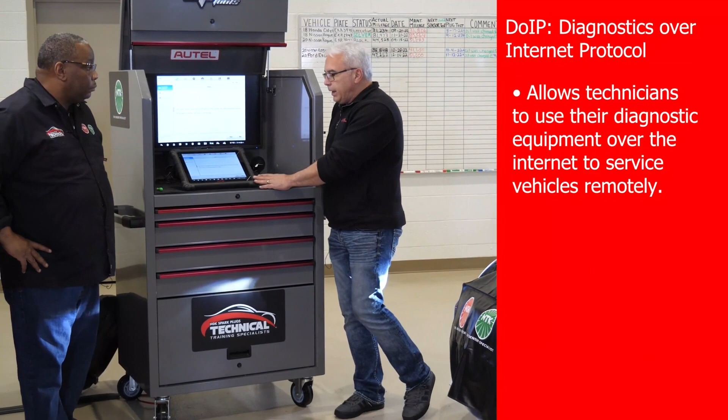And what does DOIP allow us to do? It allows us to take a piece of diagnostic equipment made for servicing an automobile in the repair facility and being able to hook that up to the internet and perform remote diagnostics. Now, all of our Autel scan tools, the topper end of our spectrum here, do support remote diagnostics, which is something that we can go ahead and certify that somebody's an expert in a certain area, whether it be reprogramming or some form of diagnostics, whatever the case happens to be.

And we all need help from time to time in our service space. Maybe we don't have the equipment, maybe we don't have the knowledge or the experience on a certain type of car. And if I go ahead and subscribe to remote diagnostics, I can go ahead and turn that feature on my scan tool, and it will pull up a list of people that are qualified for the area that I need help with. And then I can select. There is a fee, obviously. Those people aren't going to work for free.

They're people like you and I. We all have our specialties within the industry. We just, at Autel, vet that they are a legitimate expert, and then we can rely on their experience or maybe their equipment if it's relating to programming or whatever the case happens to be. So with the DOIP protocol that a lot of the European cars are going to, we need to be able to support that with our diagnostic equipment so that situations like what we just described can actually occur, whether it be remote diagnostics, remote programming, whatever the case happens to be.

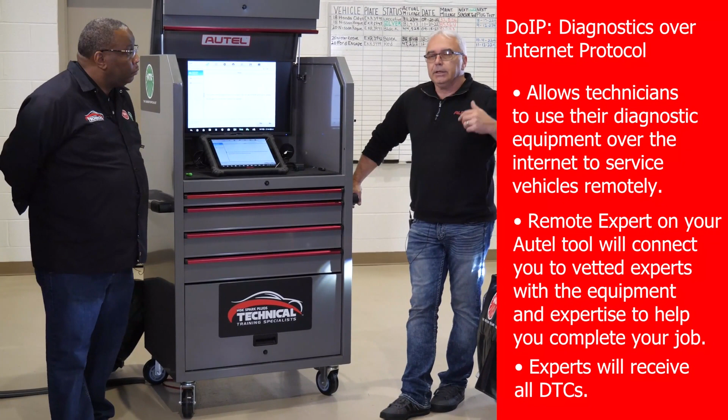Another thing to keep in mind with the DOIP protocol is it will give me, as the expert interfacing this, a list of every trouble code that was ever set. So this is beneficial as well.

It's kind of like dealership networks had this ability for a long time, not so much through the actual vehicle, but if a car came into a dealership, it was programmed into their little computer. So even if I took my car to a Chevy dealership in Ohio, and then moved out west to California, because they were all within that General Motors network, that new repair tech could pull up the repair history and complaint histories on my vehicle. We have that ability here with this new type of protocol.

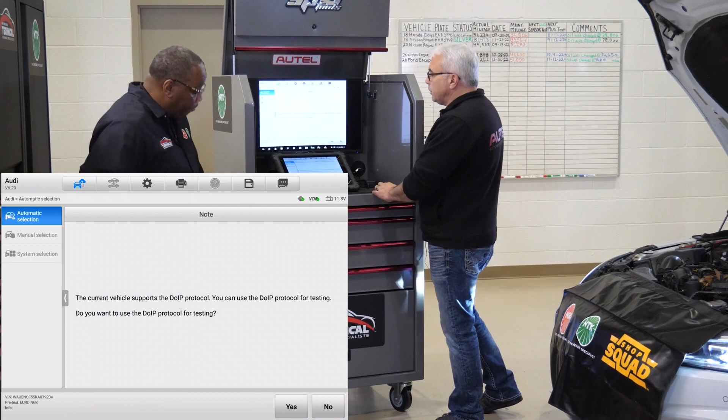So when I first hook the scan tool up, it tells me the vehicle supports it, and asks if I want to use the DOIP protocol for testing. I'm going to say no in this instance. I don't have to say yes. We're going to keep it internal as to us doing types of testing on this vehicle.

So we'll let it establish communication. I'm pretty sure I left the key in the on position here. Again, all the screens look very similar. We start off with the topology screen. We can also select the list to see all the different modules, see if it supports ADAS, stuff along those lines. And then I have all my little buttons on the left.

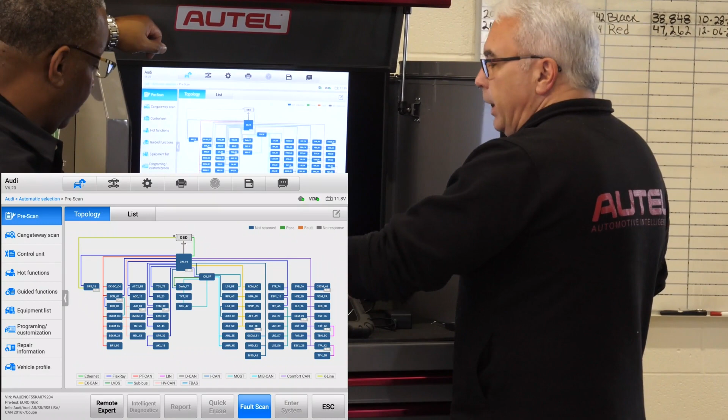I can do a fault scan. We've done this on several other cars throughout our training webinars here with NGK, so just to save a little bit of time, we'll bypass that. We have our hot functions, which we referenced in two of our previous webinars as well.

And we can go right through the list here, or we can select specific types of information that maybe Phil wants to share with us here. Yeah, great. Yeah, thanks, John.

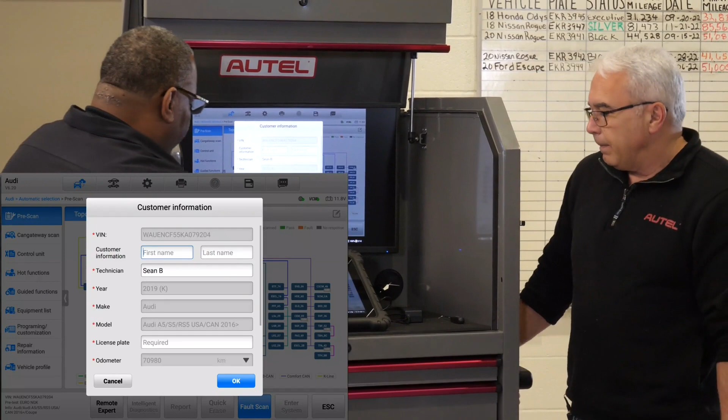So if we hit fault scan here and just let it go through its thing, we could simply type in the customer information, and we'll put a substitute license plate in there. Anything with an asterisk has to be filled out. So once I did that, now it's doing its thing.

Notice that it's going ahead and talking to each one of the modules on the network. You can see how many modules this particular Audi has—now that is more top of the line type of vehicle—but there are many different modules talking to each other across the various networks that this car supports here.

Anyone that actually has a trouble code will be highlighted with the little orange, and it'll give you a little number in a circle, representing how many different types of codes there happen to be.

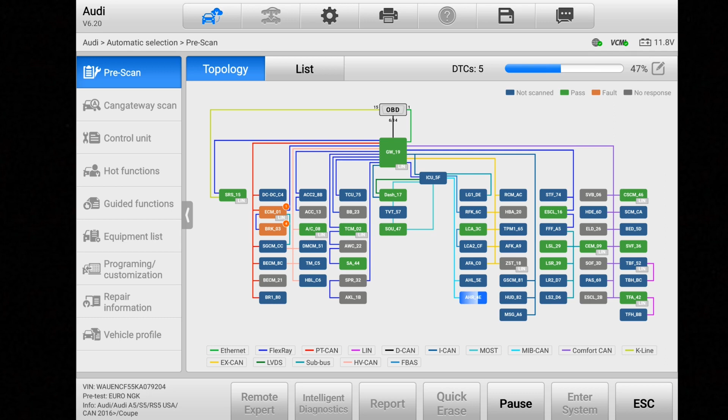And what's great about this too, look at the color coding of the modules that have not been scanned yet—those are in blue—and the modules that have been scanned and passed are in green, and if there's a fault, it'll pop up in orange. And another great aspect of the Autel scan tool is that if we're not getting any response with that particular module, it's going to show up in gray.

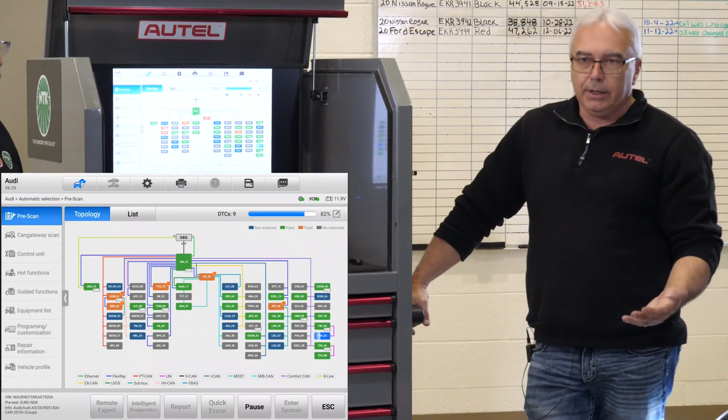Also, the color coding of the wiring on the topology screen can aid in your diagnostics as well, not just necessarily on European cars, but any of the vehicles we've been talking about. Each one of these different color codes represents a different communication line of data. So if we happen to notice that all the modules connected on the red line had no communication, well, that's going to give us a diagnostic pathway, so to speak, right? We probably don't have a half a dozen bad modules that are causing the problem—it's probably more of a circuit type of problem that we'd want to address our attention to.

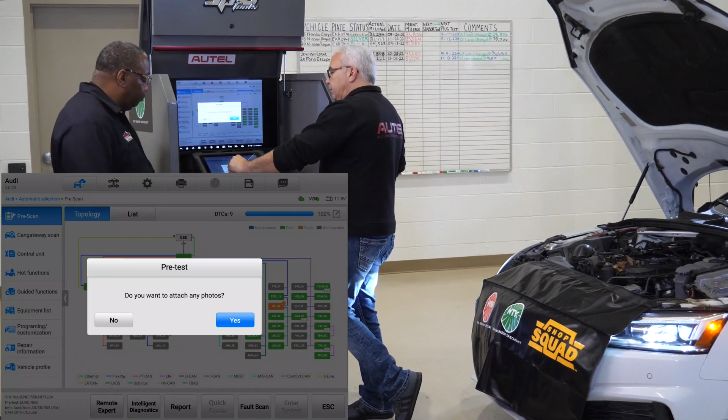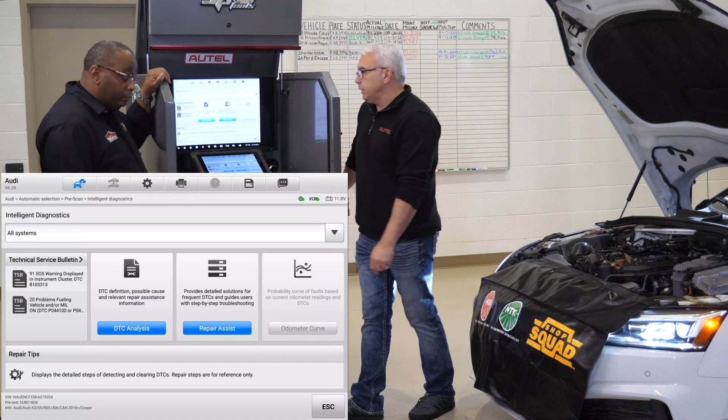I don't want to attach any photos to the pre-scan, so we're just going to say no. And at this point, we do have the Intelligent Diagnostics button, so we'll go ahead and click that. Now remember, we did have a couple codes that pulled up. We got a couple technical service bulletins that may or may not apply.

What's cool is if you see at the very top here where it says all systems - if I click on all systems and say, hey, I just want to see what's going on related to the engine management system, we can see the engine control module here and all the codes related to that. Then you have the ABS system, the brake system, tire pressure warning. So depending on what direction you want to address what the customer is coming for, this is all about meeting the customer needs while performing the diagnostics.

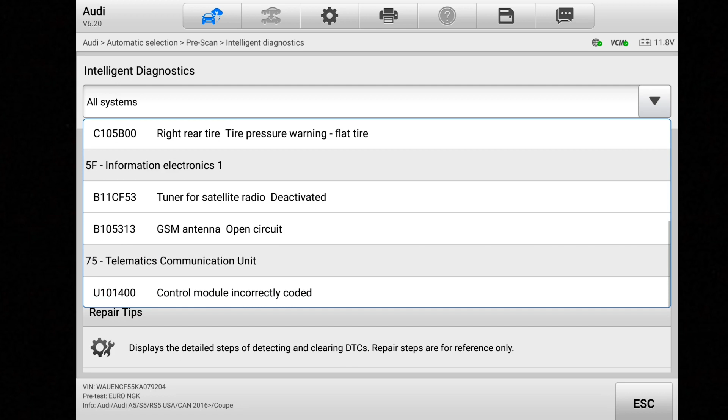So if the customer just came due to the check engine light or some sort of drivability concern, then we'll walk down that path. So just for giggles, let's stick with this particular ECM code, and the Intelligent Diagnostics here show you the technical service bulletin that may be related, like this P0441.

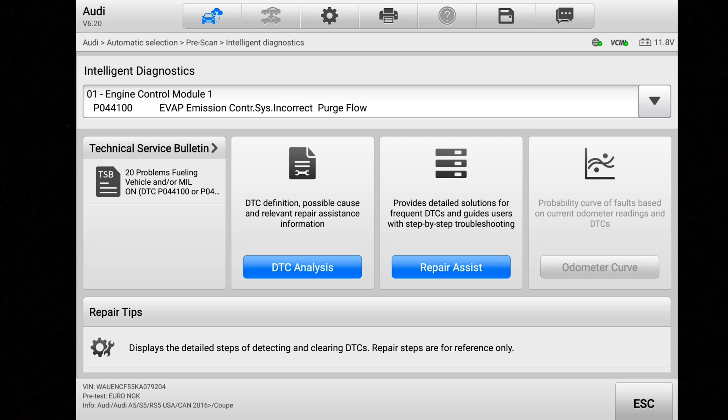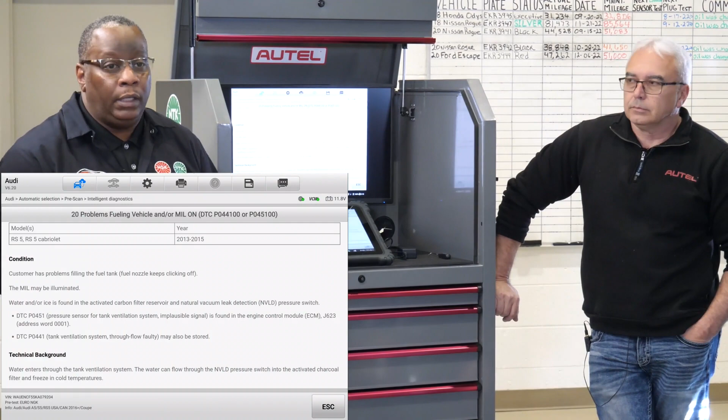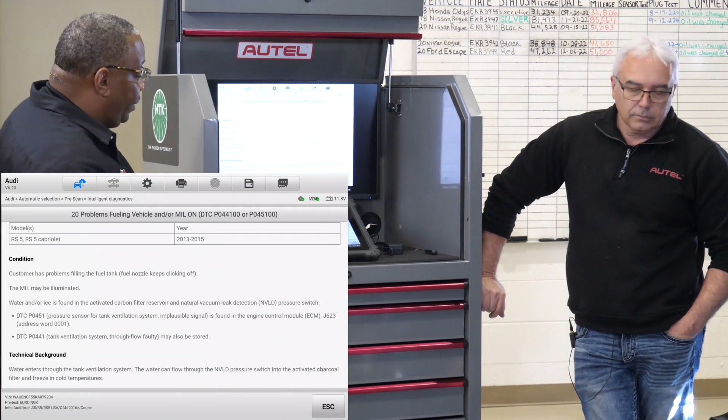Let's click on that, and you can see it outlines the technical service bulletin to allow you to go through your diagnostic process. What's the diagnostic process? First, we verify the customer concern. Then we walk through any type of history we could learn, like John just mentioned - if we wanted to go through the Audi diagnostics and look at the entire history of what was happening with this vehicle, any codes from the past. Fine, but having a conversation with the customer, checking repair history, understanding what may have been done within the last 30 days or so, and then continuing with a full system scan. We look at the DTCs, we see that we have a DTC, and the technical service bulletin is the next step of the diagnostic process.

As we go through the diagnostic process, it's nice to work with scan tools that show us intelligent diagnostics, bringing that information back in instead of us stopping and going to look in our information database on a different system. This is really, really helpful in streamlining our diagnostic process.

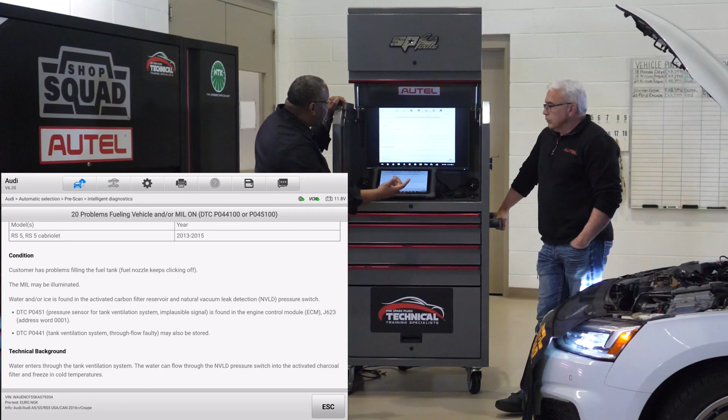With this here, we could take into consideration that the condition is that the customer has problems fueling the tank. So right now we go through the technical background, then look through the possible solution and carry on from that point.

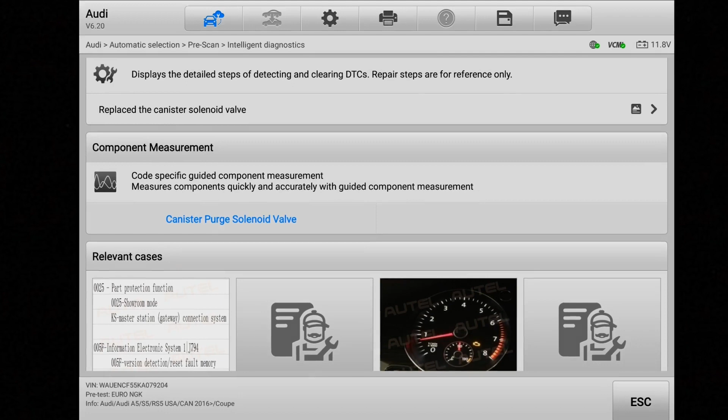This is really cool for us to look into different types of component testing. Like if we wanted to go into this right now and do the canister purge testing, it automatically sets us up with a known good, and we'll be able to look through that and say, okay, I want to look at the data and see what we're finding. What's great about this is it walks you right through. We don't have time to actually go through all of that, but it's good enough to show you the functionality, where to go, and what these options are.

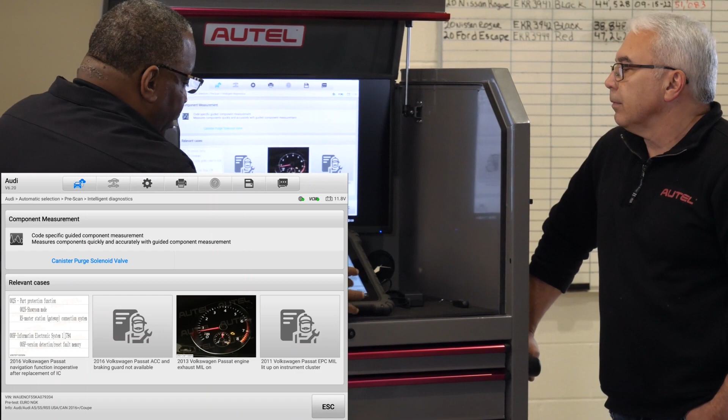So let's back out here for a second - yes, we want to exit and continue on. When you look at some other relevant cases, you could look at that information as well just to get an understanding of similar systems so you could understand how to troubleshoot that.

But I want to dive into, with John, all the other features here where we could go into the hot functions and see what we could do there, from resetting the oil light all the way to the battery management system. All these options are available to us.

So if we go back and just rescan again - okay, I went back a little too far, but it's okay. Say no.

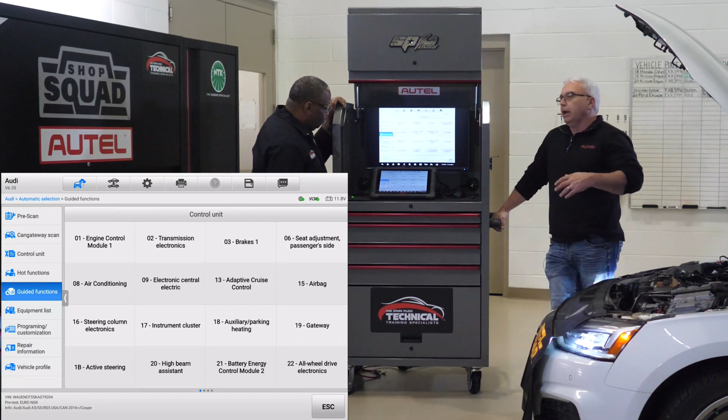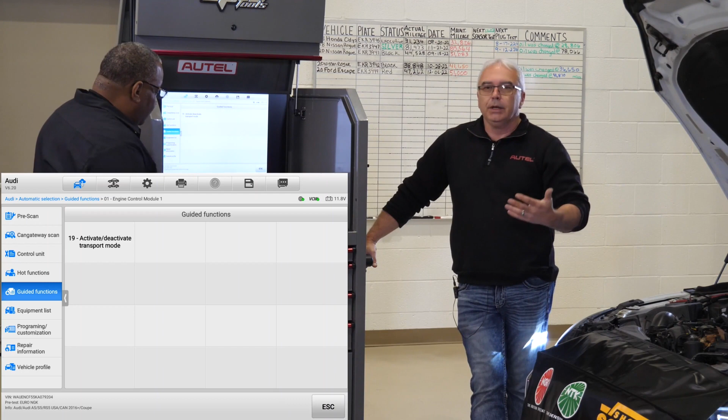And while we're waiting for the scan tool to catch up - something as simple as resetting the oil change light, on other types of vehicles, a lot of the domestics, it has gotten more difficult over the years. But I'd say some of the hardest ones to reset the oil change service light, something as simple as that, not even a highly profitable job for a typical auto repair shop, are the European vehicles. In fact, there was a time in my career where you had to buy special service tools for the European vehicles just to reset that oil change light. It's nice that we have that feature built in, especially on European cars.

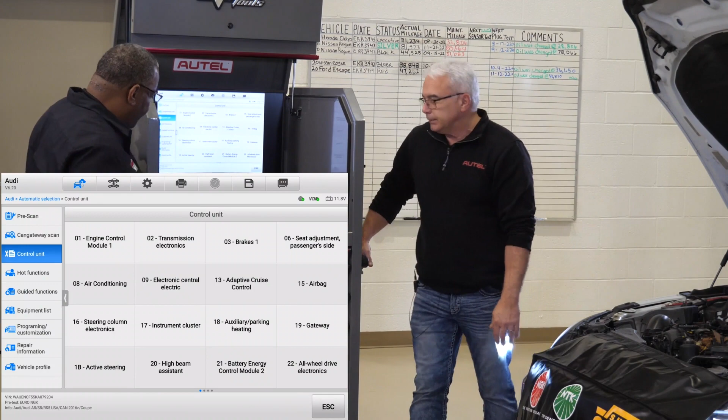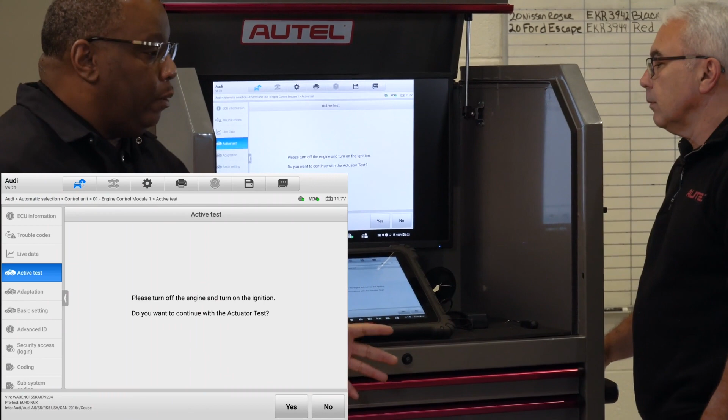So going into the control unit - thanks for that, John. If we go into the engine control module, and then we want to pick what option we want to look into. Let's go and look into what we could activate, because it's all about diagnostics and using this bidirectional diagnostic system to aid in streamlining your diagnostics.

So if I want to check the coolant fans that are not operational, I could actually run this particular test right now to activate everything within that circuit—the relays, the computer commanding it on—and do the appropriate testing with our DVOM in graphing mode to watch the current or even watch the voltage.

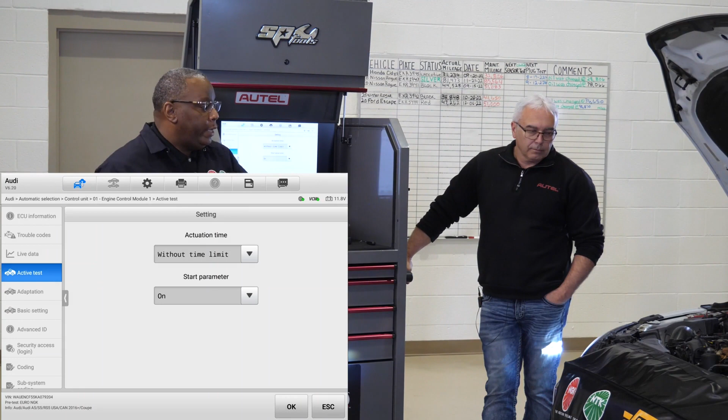So this has a split screen which you could look at both. You have an option as well too, if I back out here and go back in, it gives me an option to look at the scan tool data while I put that command on all the fans. So this is where you click to look at the live data, and you click everything you want to visually see related to the coolant fans. This is really great for us to use within our diagnostics.

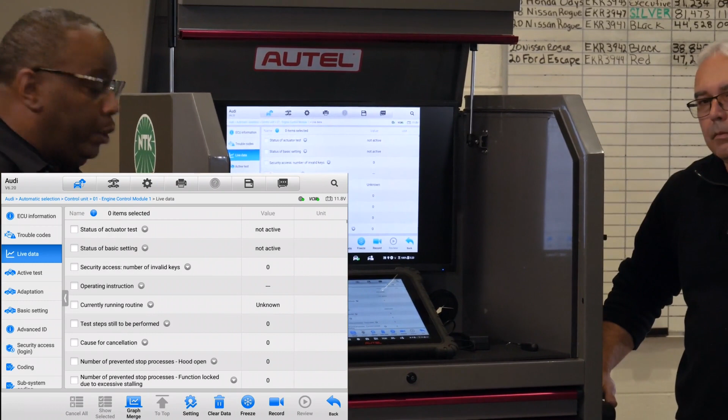Now, of course, when we look at the live data as a whole to list all the data PIDs, it gives us some options here. And like we showed you in the other webinars, we want to be able to select what we're really interested in seeing instead of scrolling through everything.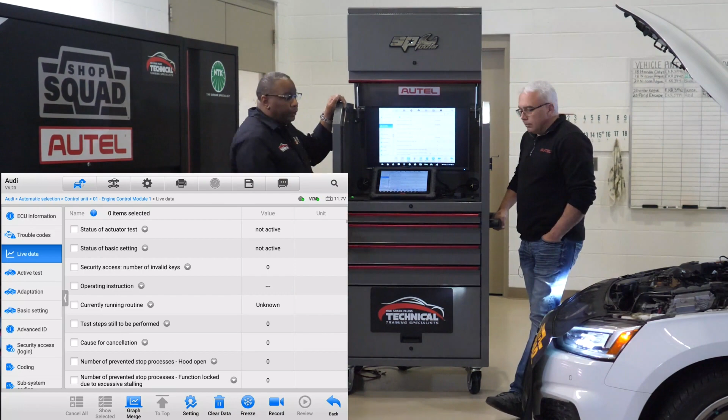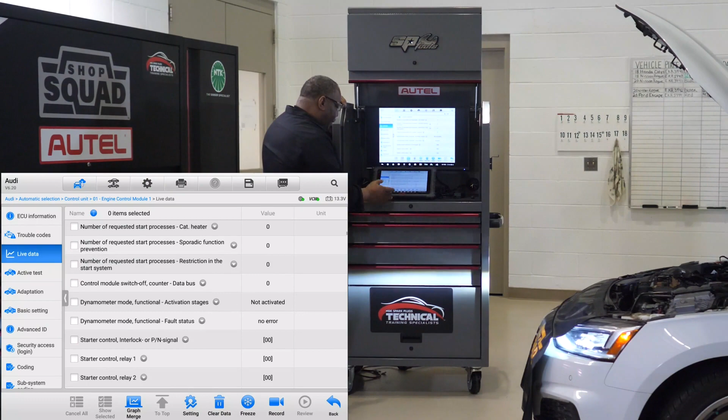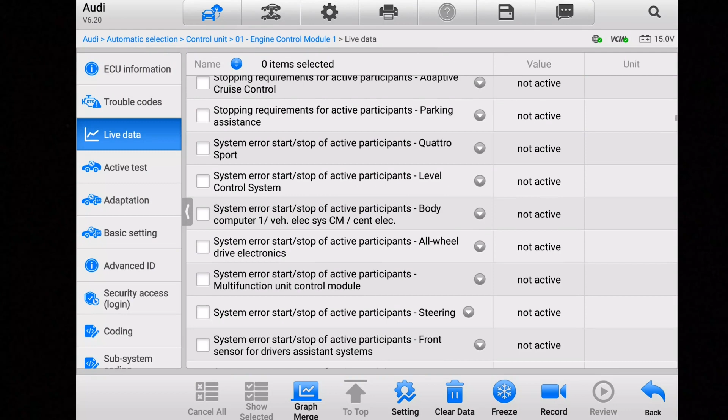So for this particular one, let's start it up and then we can just look at some live data at this point. In the meantime, you can see the laundry list of all the data PIDs that are here. In today's vehicles, we have to start selecting what we need to see in order to come up with our diagnosis. As you scroll through all of these, you can see how long this list could get.

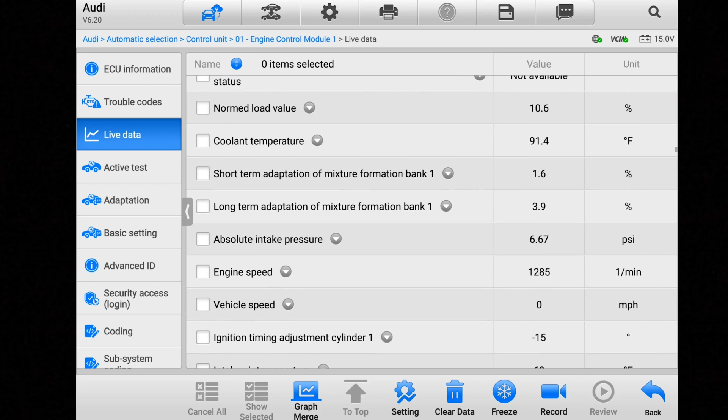So if I want to look at the engine speed, I want to look at my long-term, short-term adaptation. I want to look at my oxygen sensors.

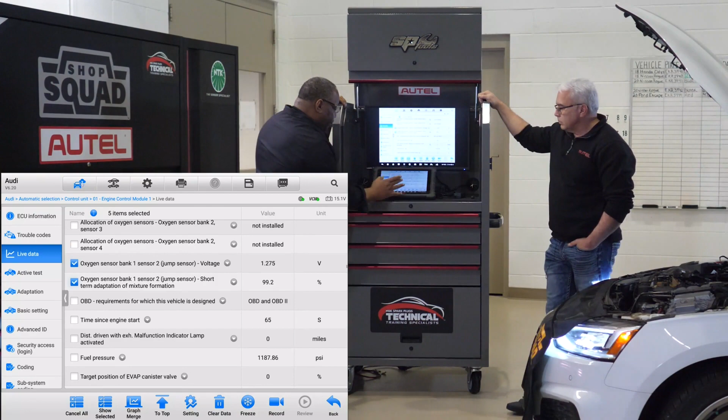And this is the information that we could just—I'm just selecting a few here so that we could graph out and show you, so you just streamline what you want to look at. As always, like we showed you with others, we don't want to get tripped up over all the data PIDs that the manufacturer specific has on this Audi. If you're an Audi tech and used to working on these a lot, this will look familiar. But if you're not, we always have the option of switching over to our generic OBD2 mode.

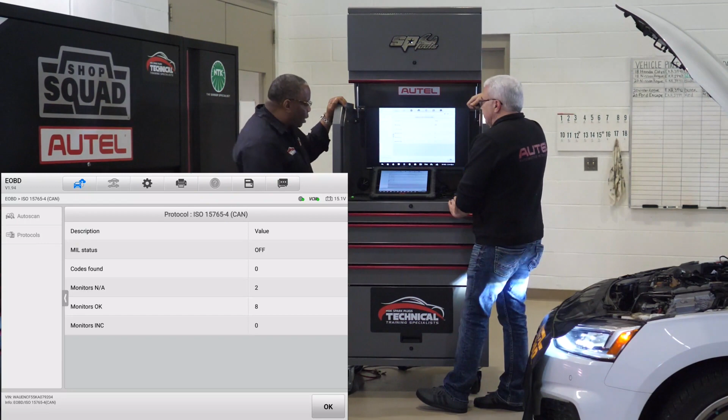All right, so we're going to auto scan this because we don't know exactly what the protocols are to pick from. We know a few, but we'll let the scan tool do the work for us. All right, hit OK. Now at this point I want to look at live data. It's calculating the number of PIDs in which you're going to be reading off of. Hopefully it's not going to be as long a list of data PIDs under manufacturer specific, and we can see what lines of data we could easily look at.

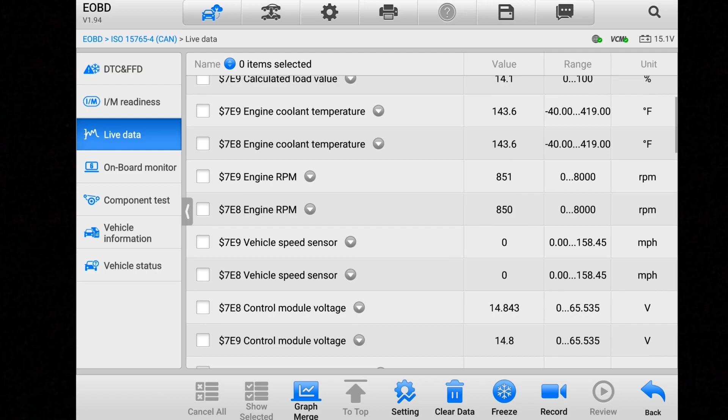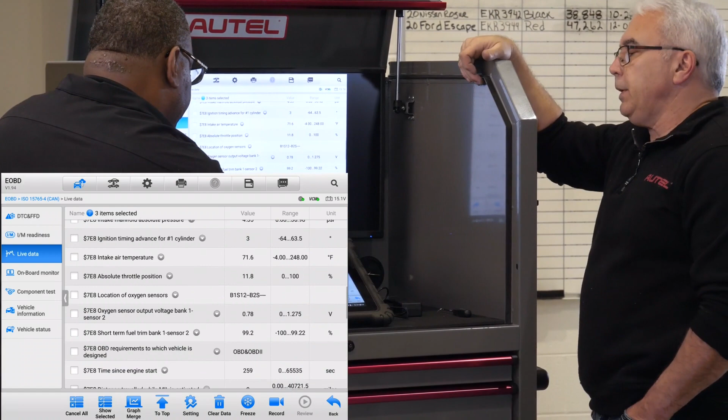So if I'm really interested in RPM, more so fuel trim related, I want to use this as an exercise, and I want to be able to look at—here we go—short-term fuel trim bank 1, long-term fuel trim bank 1. It's only going to be bank 1, yep. I'm just looking for my lambda reading. We have the millivolts for the oxygen sensor.

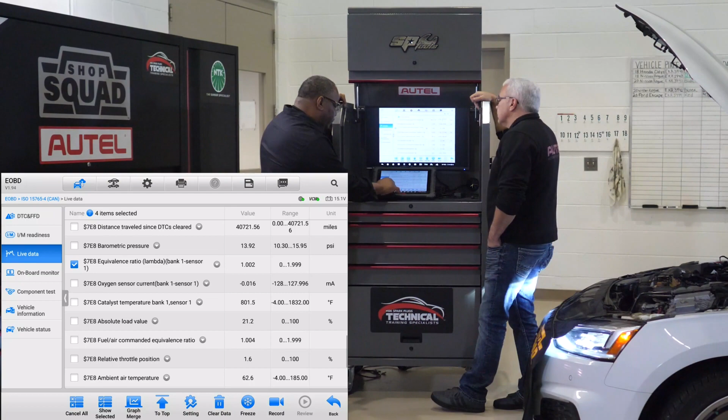All right, okay, bingo. So you notice it didn't just pop up at me, it first showed the equivalency ratio. Those terms are interchangeable because we're just looking at our lambda reading here. All right, it's going to click for me, great. And the fuel air command equivalency ratio, I'm going to hit that. All right, let's just look at what we selected.

So now this car does not have any known issues, no check engine lights related to what we've seen, but from a fuel trim perspective, we looked at a lot of manufacturer-specific data PIDs that could be confusing to a person or tech not used to looking through the lenses of Audi diagnostics. We could always fall back on OBD2 global information.

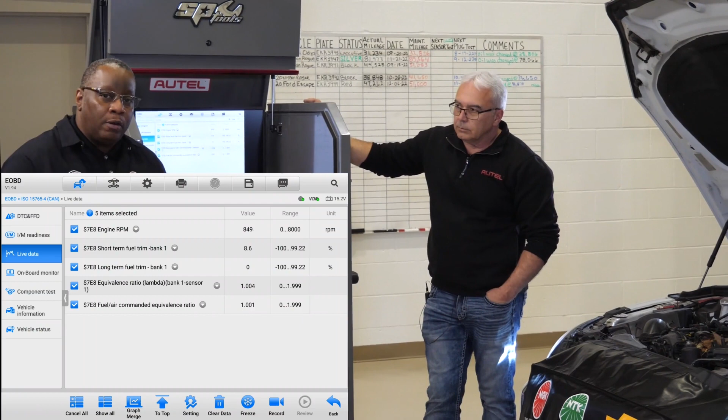We have the RPM at idle. We have a short-term fuel trim at about 9%, bank 1—this is an inline four-cylinder, right? Now the long-term fuel trim is 0 here. Let's keep in mind, just because it's an inline doesn't automatically mean it will only have one bank. We're going to look at a BMW later on, and some BMW applications will have bank 1 for the first 3 cylinders and bank 2 for the next 3.

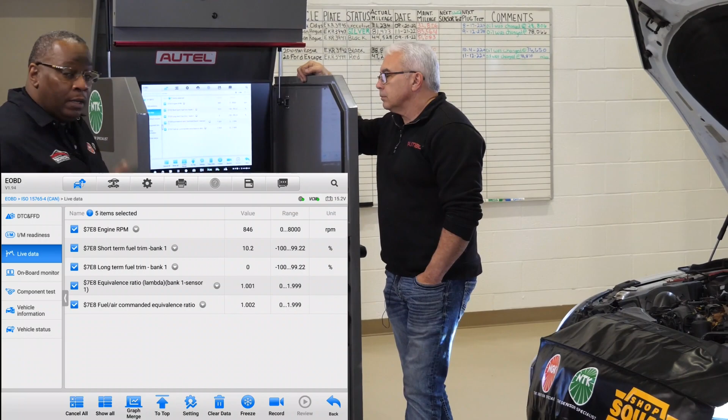But on this Audi, one bank. What I want to focus on here is the equivalency ratio and lambda. Look at that, it's right about 1. We want that to be right about lambda 1.

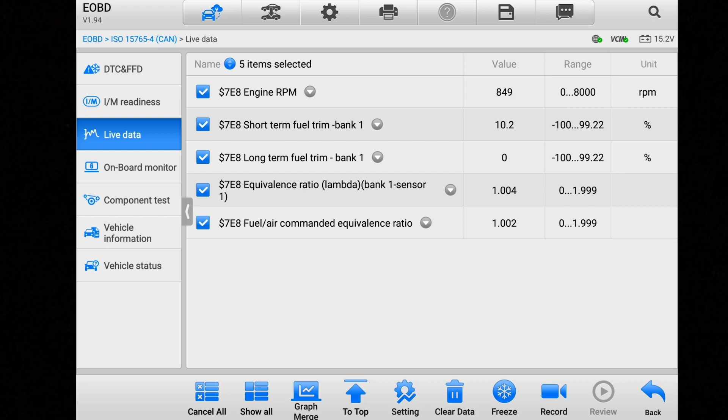Because anything higher than lambda 1, let's say lambda 1.38 or something like that, that means I need to look for a lean condition. What's going on with that? If my lambda reading is below 1, then I'm looking for a rich condition.

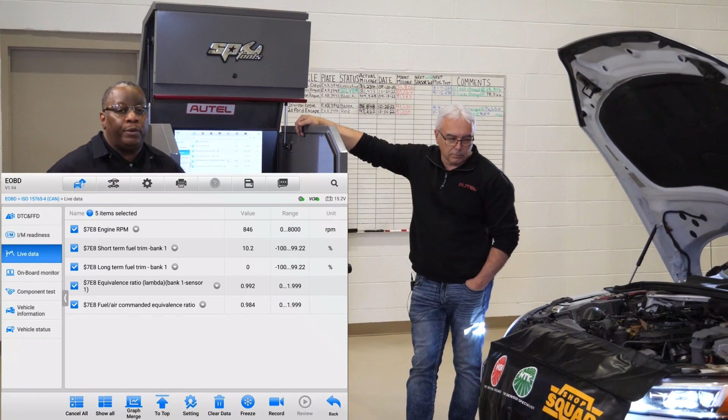Now, if it has a rich condition, we know the computer is going to start compensating for that rich condition it's trying to control, meaning we're subtracting fuel. So we can still apply the basic knowledge we learned about OBD2 engine management systems and their strategies for fuel trim by understanding Lambda, especially with these Euros.

We're going to cover this on the Audi, and we're going to cover this on the BMW, and we'll look at it later. So don't get tripped up over the air-fuel ratio sensor readings that the manufacturer-specific data PIDs may have on this application. Fall back on Lambda. What's my Lambda doing at idle? What should it be, right?

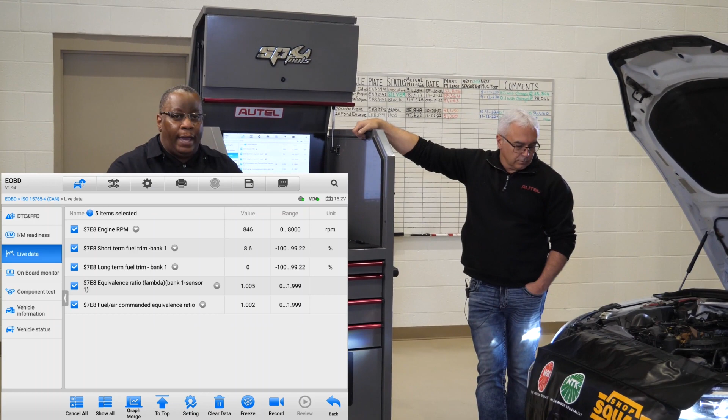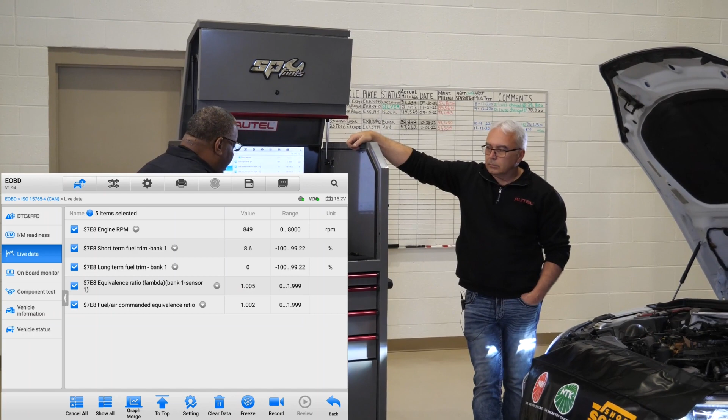So Lambda, just in terms for those that may not be familiar with that terminology, the days of us looking at stoichiometrics, the 14.7 parts of air to 1 part of fuel, that's the perfect condition. So anything outside of that, we have to look at that 14.7 stoichiometric number in terms of Lambda, which is 1. So anything above Lambda 1, we're searching for a lean condition. Anything below Lambda 1, we're searching for a rich condition. So just looking for Lambda 1, or what Lambda is, we know what direction to go in.

Right now, we're hovering around Lambda 1. Another data PID that I picked out here has the fuel air commanded equivalency ratio. So it's commanded to say, I want to be at Lambda 1.002. And we can watch the actual reading and see whether it's there. So it's a great comparison.

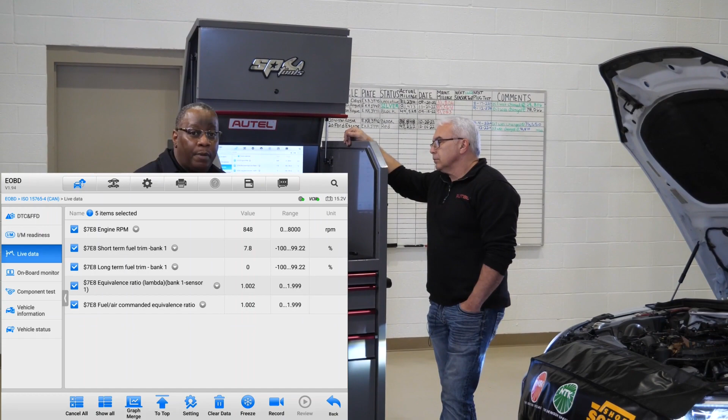So even if you didn't know, based on what I just said, the computer's already targeting to say, I want Lambda to be here. And then you look at the actual reading as it's running to see whether it's staying within that.

So I hope you were able to get a good takeaway from that aspect. And we're going to continue on the next step here.

Okay, now we have a 2011 BMW product, and again, we want to really emphasize this. We'll go ahead and do our pre-scan on the vehicle. We'll go ahead and select fault scan.

Again, anything with the red asterisk we have to fill out, so we're just going to make up a name for the license plate here, say OK. And it's going ahead and scanning all the modules.

Now the reason why a pre and post scan is so important, obviously for insurance purposes, if you're in the collision industry, it's mandatory. But in the auto repair industry, the service part of it, it's not really mandatory as of yet, but it's a good practice to get into because number one, it forces us to communicate with all the modules.

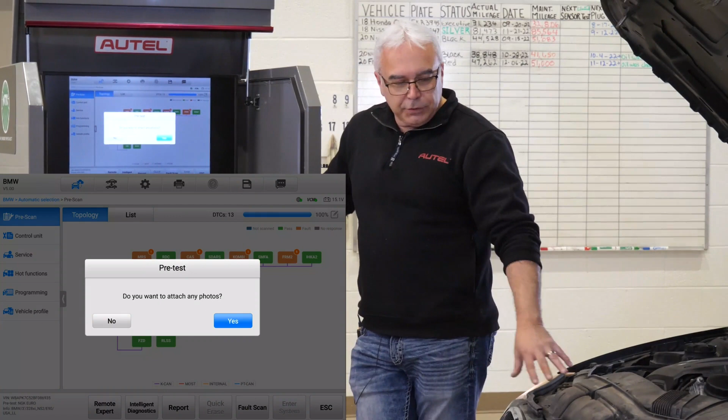A lot of times, there may be some trouble codes in a module that maybe are being influenced by other codes in other modules. So a prime example of this, we'll go ahead and stray away - we'll keep it import, but stray away from the European car line, make it something a little bit more popular that a lot of people have seen.

On a Toyota product, if the check engine light comes on, your ABS light comes on, your traction control light comes on - if you go through and do this type of testing, you'll notice that when you pull those codes out, you don't really have all those problems. You have one problem, whatever that code is in the ECM, and when you fix that, the other codes are going to be repaired as well.

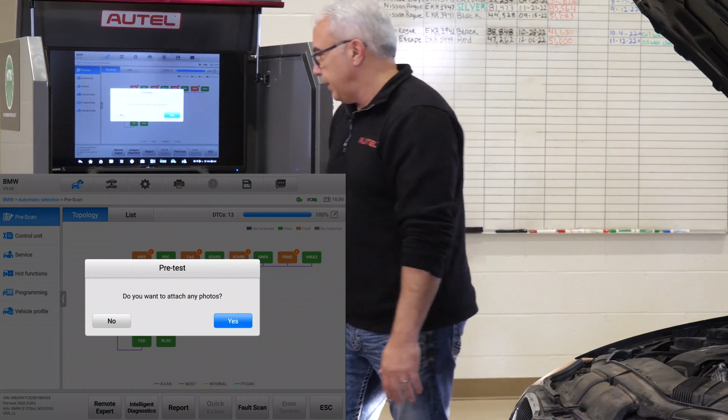Also, it's good safe practice because I can print these reports out, give them to the customer and say, when you brought me your vehicle, these are the codes that you had. When it left, the codes that I was hired to go ahead and address and repair are now out of your vehicle. Maybe they didn't allow me to repair all the different codes, so obviously those codes would still be present. So I don't want to add any photos.

Now I actually have a legitimate pre-scan stored. I also have some intelligent diagnostics, and I do have codes stored, and it looks like about 7 different modules on this particular vehicle.

So I'm going to hit the intelligent diagnostic button. I have no TSBs available for me, but I'm going to go to the diagnostic trouble code analysis section. I have one up on top here, a communication error with the GPS system on this vehicle, and the other one is a media software reset.

So if I were to talk about the communication issue, click on that, I can pull up specific information that maybe I'm not quite familiar with because it's a European car. For instance, the condition for setting the code, the supply voltage to that module was from 9 volts to 16 volts.

The terminal R was on. Check for the fault during the startup and during the cyclical test routine, currently every 30 seconds. It also tells me some possible solutions of programming a specific communication box. If programming was not successful, it tells me to go ahead and replace that box.

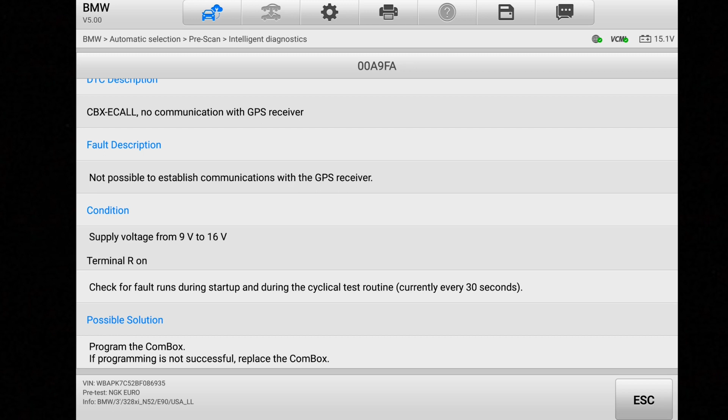So for that particular code, if I've never had any experience with it, I know what to look for when I start doing my pinpoint diagnostic testing now. I know the voltages I should be looking for. I know the conditions it has to be in for me to properly test and diagnose that. And then I also know what my course of action would be.

So let's say all my supply voltages tested out good. I could try to do the reprogramming on that particular module. If that did not happen to fix that particular code, then it leaves me one other choice. I'd have to go ahead and replace it.

Now remember, if you don't have the ability to program a European, domestic, or Asian car—since we're talking about European cars, you may not have all the European fancy software to go ahead and do it. Or maybe you have a J2534 box, but you're just too shy or timid to do it on a car such as a BMW.

Little personal story, my one-man auto repair shop was right next door to a very affluent body shop. I got a ton of work from that body shop all the time. They called me up one day and asked me if I could reprogram a BMW for them. I said sure, go ahead and bring it over. I didn't have the OEM scan tools to do it, but I did have J2534.

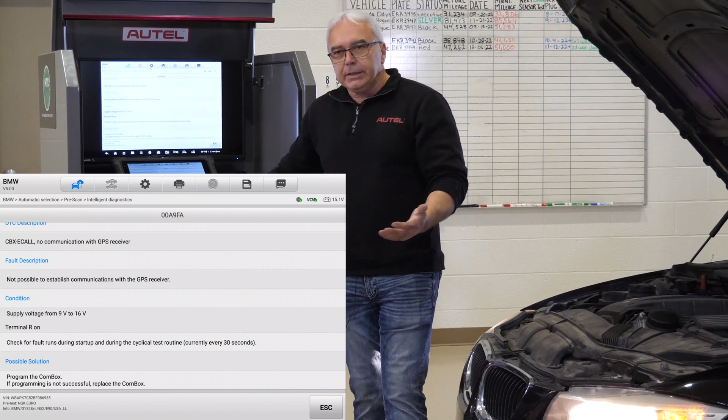Anybody that's done reprogramming in the past knows there's some safety concerns involved. 99.999% of the time, everything goes off without a hitch. But if for some reason the tool becomes disconnected from the OBD2 connector, or you lose internet connection, or anything crazy like that happens, you may have just bricked a module. In that case with BMW, I might have bricked several modules on that car.

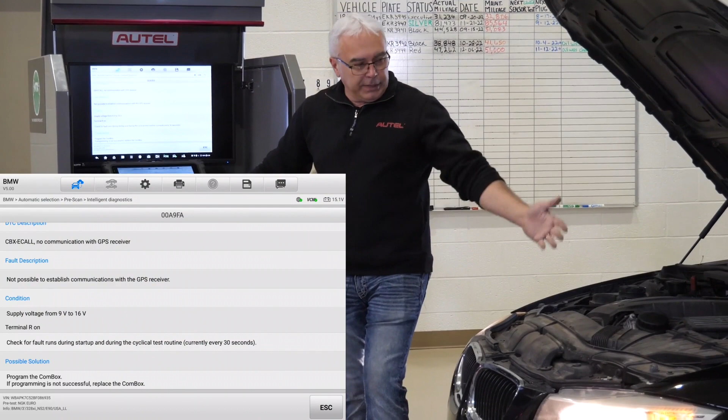So this would be a prime one that maybe if I felt timid at all, if I got to this section of having to reprogram, to choose the remote expert option and find a remote expert that would take on the job, somebody that has the experience to go ahead and do that reprogramming for me.

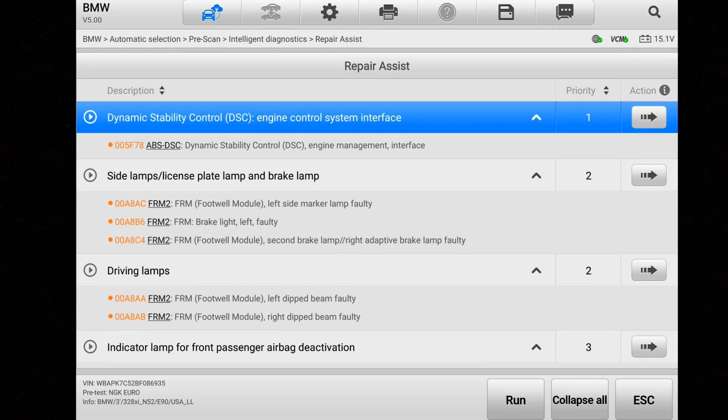I'm going to escape out of here. I'm going to hit the escape button one more time, and I'm going to scroll back up here, and we have what's called Repair Assist as well. So I'm going to click on that button, and it gives me a list of the different types of codes that could be stored on the vehicle. It gives me a short little definition of whichever one here.

But if I were to select on this one here, I'm going to establish some communication. Let the screen go ahead and update here for us.

I'm going to select next step, and got it.

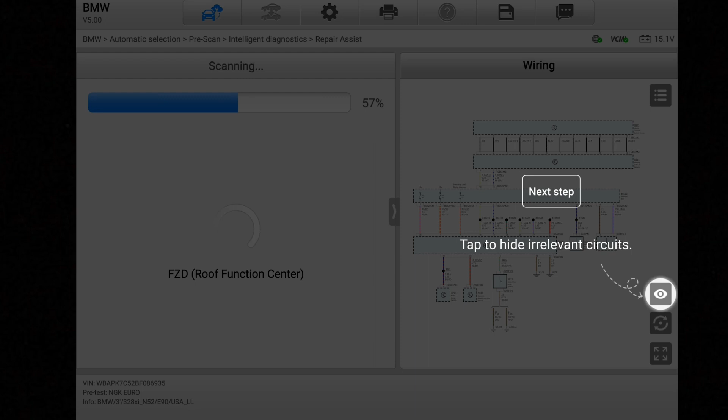Here I pull up for the brake fluid level switch, I pull up specific information, repair type of information, hence the reason why we call it Repair Assist, on the actual brake module.

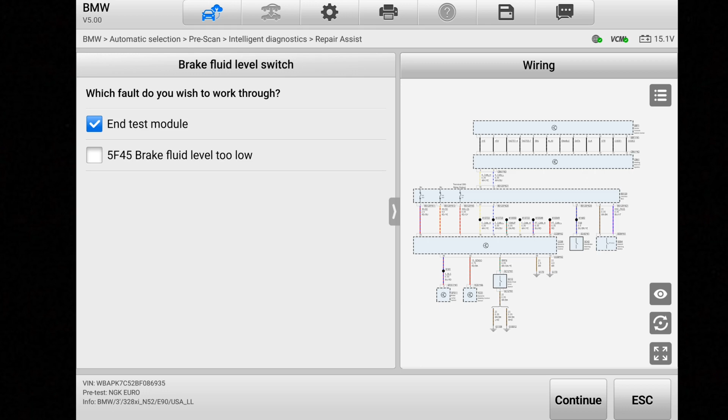So I may not have information system that can pull the information up, or since we're talking European, the wiring diagrams that are common on European vehicles are what's called DIN network type of diagrams. It's very foreign to a typical tech if they have not used that type of wiring diagram before.

The nice thing about the Autel scan tool is once I know a certain area I want to concentrate my diagnostics on, I can go in through the intelligent diagnostics section and pull up a more conventional looking wiring diagram that maybe I'm more familiar with reading, which is pretty much what all the domestic and Asian vehicles have used for decades. So I wanted to pull that section of the scan tool out for us as well.

And at this point, I'm going to turn things over to Phil, who's going to take you to the next step with using our fabulous scan tool here, diagnostic equipment, and using it in some real-world scenarios.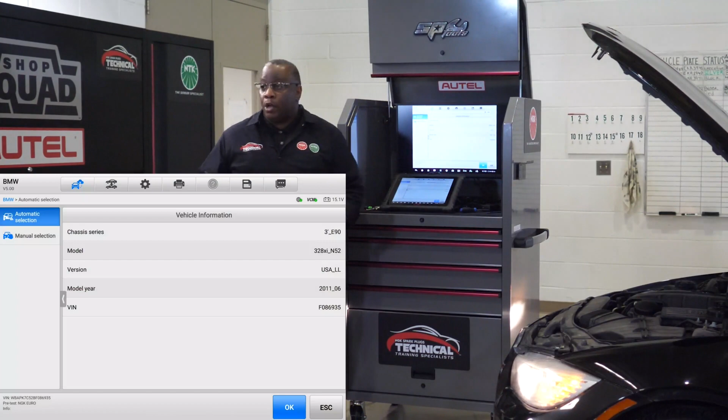The next thing we're going to look into here, this being the N52 engine, straight 6, and a couple of points I'm going to go over here from the scan tool point of view. So we have all the vehicle information in. I'm going to continue on and allow it to establish communications.

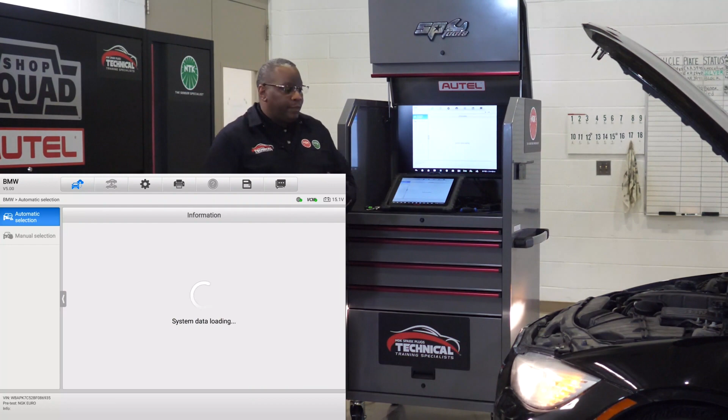A couple of things I'm just going to highlight on the data stream, but more so on what the Autel Ultra can do as far as functional tests. With this engine, you get misfire codes, and sometimes we have to rule some things out. So I'm going to walk you through some steps here, and as we're continuing to scan and get the information in, we'll walk through that.

Meantime, I'll swing to this side so I got more of a good angle. So as I talk about some things here, we could view this and also get an idea where it's at that I'm talking about here on the engine.

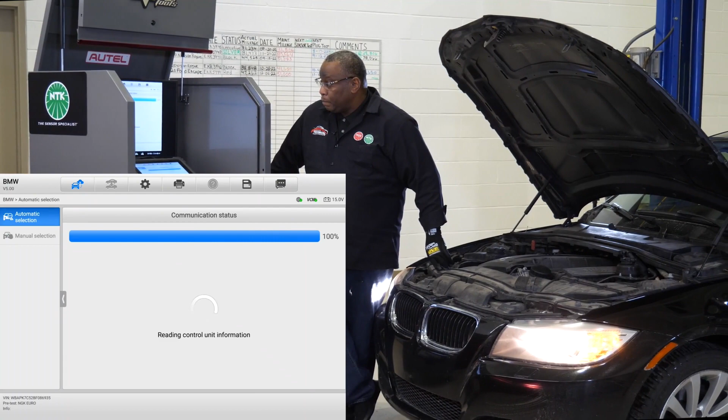So on this, the key engine management components here, this is a VVT system with a Vanos cam phaser. The setup, we have an exhaust and an intake, a VVT solenoid that is right below here.

I'm not going to go through the whole full scan, we went through that before. I'm going to go right into control unit and pick the control unit that I want to access and look at the different functional tests, or some manufacturers may call this an active test.

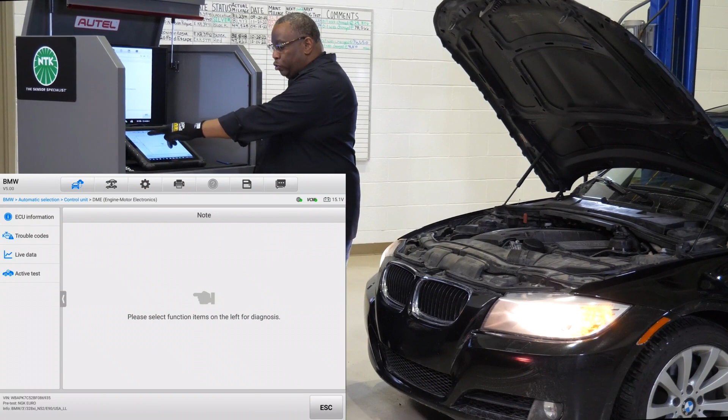So I'm picking the control unit for the engine. Now I have an option of trouble codes, live data, or active test. At this point, the engine is running well.

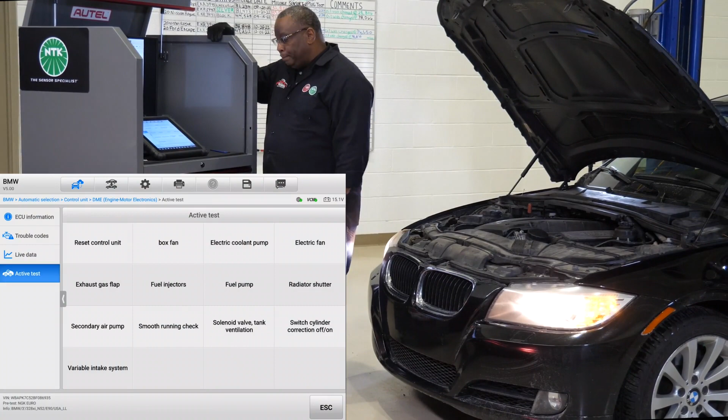However, we want to get an idea of the fuel injectors and how they're contributing to the engine. So if we had an intermittent P0300, then what I would want to do is verify what's going on with my injectors. So I'm going to go to active test and look for fuel injectors.

Now you have two different options. You have a clock fuel injector test that you could do. I'm looking for fuel injector off for every cylinder. So when I hit fuel injector off, it's going to ask me to activate or deactivate. I'm going to activate it, and then I'm going to be looking for a noticeable drop in the RPM.

Okay, let's go through that test together. Activate injector number 1. Automatically I see a drop in RPM and it begins to miss. Obviously it's a lean type miss because we killed the injector for that cylinder. So I'm happy with that.

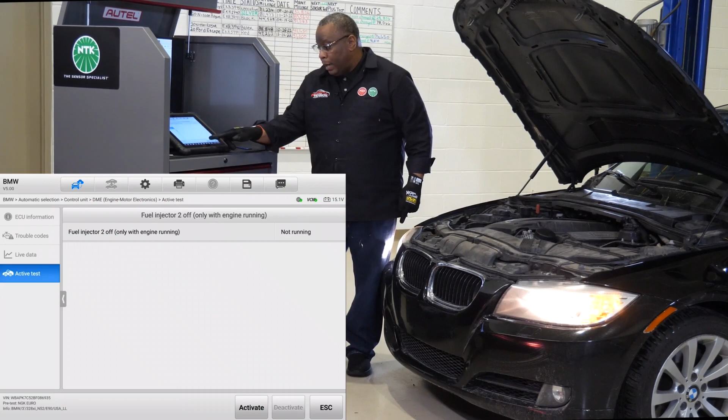I'm recording this by the way, and I'm going to go back and review it too. I'm going to back out and go to fuel injector number 2. I'm going to activate it. I see a noticeable RPM change, drop. I'm happy with that. I back out.

I go to fuel injector number 3. I'm going to activate it. I see a noticeable change or drop in RPM because I'm creating that lean misfire. I'm seeing how the engine is being affected when we pull an injector off from contributing.

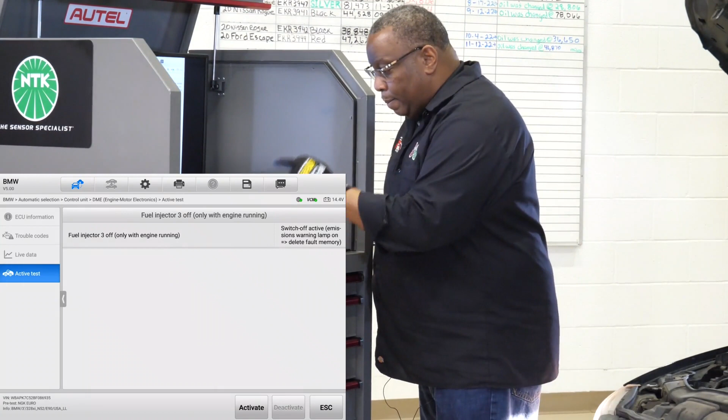Deactivate, allow it to stabilize, and I'll continue the process. I'm going to go to injector number 4. Activate. I notice a considerable difference as well. Deactivate, let it stabilize.

Now injector number 5. Activate. I notice a similar difference as well. Deactivate. And last one, injector number 6. Activate.

You could actually see whether the fuel injector is contributing to the misfire or not. So it's nice to look at a known good vehicle and do that test so you can see the difference. Okay, so if this was already misfiring and I kill injector number 2 and I don't see any change...

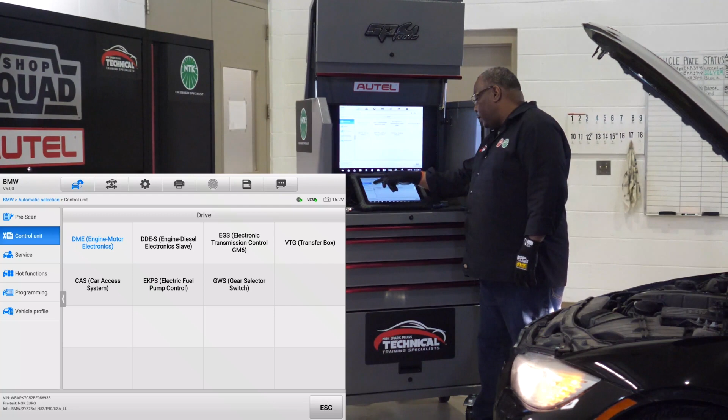Another thing too that I want to review is when I go back into my control unit, I hit live data, and also I'm going to go into operational smoothness values. This is a way in which you could actually look at how each cylinder is performing. Now, obviously no one knows the exact figures in which it should be. We're looking for similarities for each cylinder, and if any of them are out of range, that's what I'm looking for.

So here we go, we have cylinder 1, 2, 3, 4, 5, and 6 noted here, and you could see they're all within range. I'm happy with that. If I was getting a misfire, I should see some sort of change in one of those cylinders in regard to operational smoothness value. So coming out of this, I already have this pre-selected.

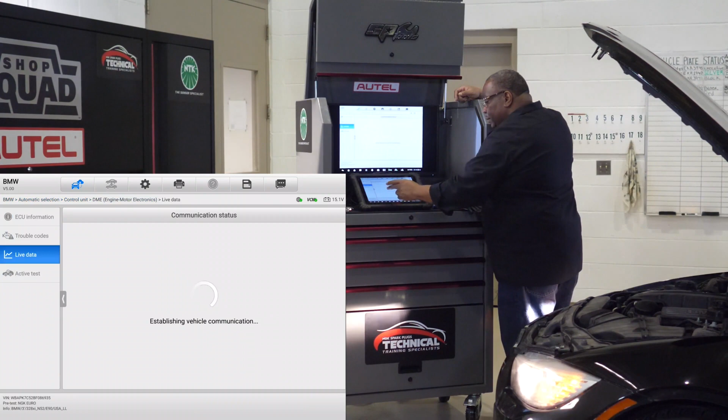So at this time, what I'm going to do is just back out of this and go back in so that we could see a little bit more information. You see I have operational smoothness value. It's only going to show you the data PIDs related to that.

So let's say that I want to go into the variable camshaft timing here. Then it would show me only the values related to that and be able to make comparisons between the camshaft timing adaptation value and the variable cam timing position for exhaust and for intake. We're looking for whatever that adaptation number is, should be pretty close to the adaptation of that.

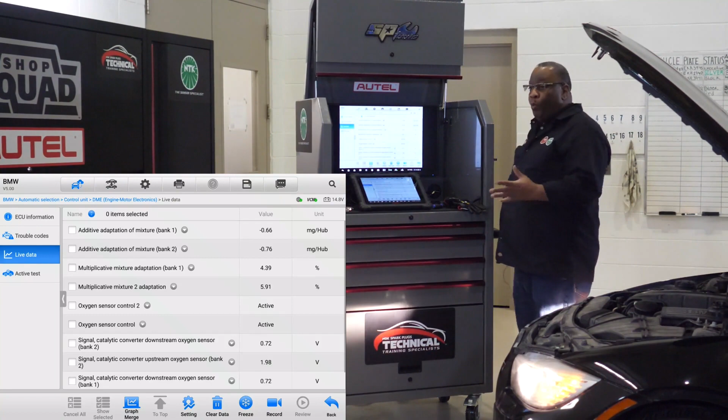So let me back out and go into oxygen sensor control, in which what I like with the Euros is it's just going to show me everything related to that. We don't want to get into that heavy listing where we have to select only the ones we're concerned about. This kind of keeps us in the ballpark, and it shows additive and multiplicative.

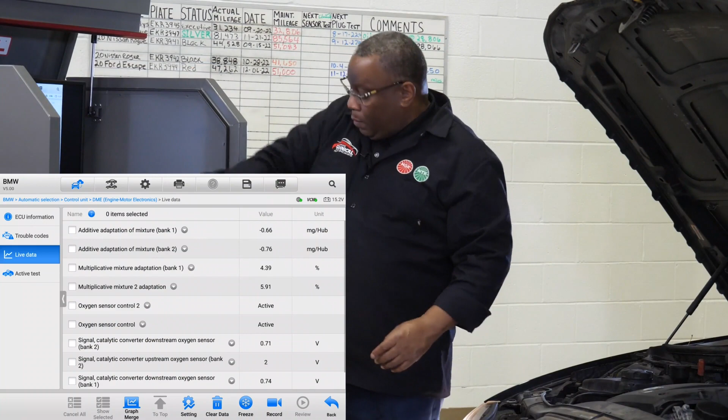One thing I want to clarify, for those of you who'd like further explanation when you see those data PIDs, this applies to Euros that will show those type of data PIDs. Additive, keep in mind, is looking at idle, okay? And anything outside of idle, in short, making the fuel trim adaptations outside of idle, will be multiplicative, under load, and it's able to give you that calculation.

So it's looking at it from two sets of lenses. Additive, just look at it at idle, right? And multiplicative, look at it when it's under load, off idle, okay? So when we look at those numbers, it gives us an indication. But again, if it becomes confusing to you, always default back to global OBD2 on these applications, in which it would put it in terms we all learned for all vehicles, looking at short-term and long-term fuel trim and things of that nature.

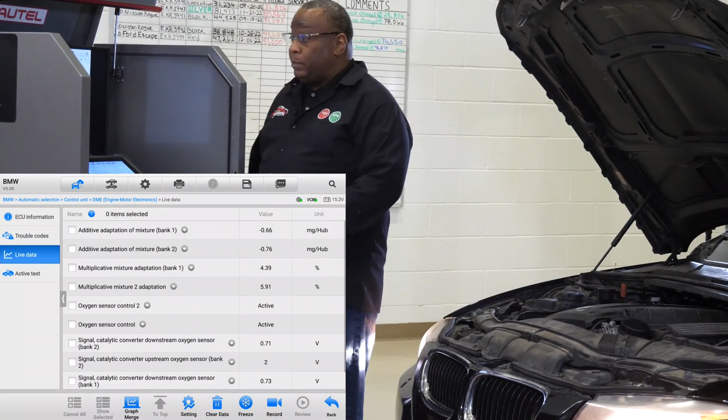But I just wanted to show the comparison of how in certain Euros like this BMW, for additive and also multiplicative adaptation data PIDs. So this is a nice setup here that the Autel scan tool has for us to investigate different options and different live data PIDs that we could see. So I hope that information was very helpful for you.

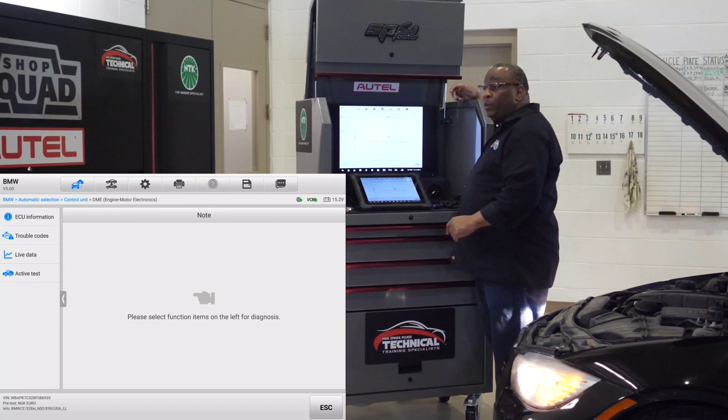Another piece of information I'm going to share, since we touched on the VVT system, especially with the exhaust and intake variable valve solenoid. What's very important, especially when you're changing the oil in these engines, the concentration is on the oil filter, but whenever you get an oil filter kit, they always give you a little round O-ring that's supposed to go at the very end tip of the ridge that fits into the filter.

That's very, very important for the VVT systems, because, especially explaining to your techs, don't look at that and say, oh, I don't need to replace it. It definitely needs to be replaced, because it plays a role in holding the oil through its channels and not bleeding back, which could cause issues with the VVT system as well.

And it could run you in circles thinking that you have a problem within your VVT solenoids, but the problem is it's not holding the pressure because that round O-ring has never been replaced and it's worn or missing. And it bleeds off when it's not supposed to, causing all sorts of VVT related concerns. So keep that in mind.

And whenever we're changing these VVT solenoids, I'd rather change them together as a pair instead of just changing the exhaust and leaving the intake one there as well. Also make note of the connectors for them.

They are interchangeable. I've actually seen where guys have replaced the VVT solenoids, the connectors are interchangeable, and the car's running like crap. They go into deep diagnostics doing an in-cylinder transducer test and noticing, hey, we may have a mechanical issue going on with this engine, but not really. It's because the VVT connectors were interchanged, and it's actually inducing that type of misalignment or missynchronization of the VVT system.